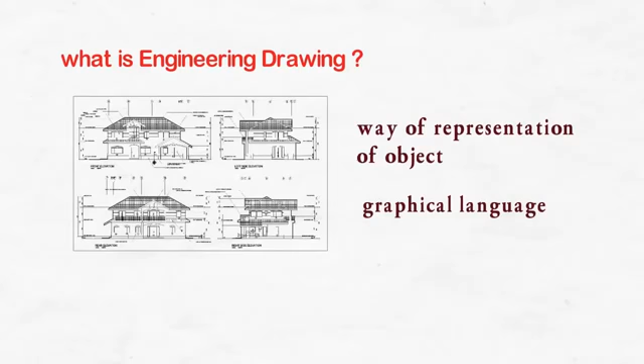It is a way of representation of objects or ideas on a plane of paper. This is not only drawing of pictures, it is a language also, a graphical language जो कि आइडियाज और इंफॉर्मेशन को एक माइंड से दूसरे माइंड में कम्युनिकेट करता है। तो चलिए देखते हैं व्हाट आर द वेरियस इंस्ट्रूमेंट्स रिक्वायर्ड

फॉर इंजीनियरिंग ड्राइंग। द फर्स्ट वन इज अ टी स्क्वायर. It is used for drawing horizontal parallel lines. The second one is set square. They are used to draw parallel, inclined and perpendicular lines.

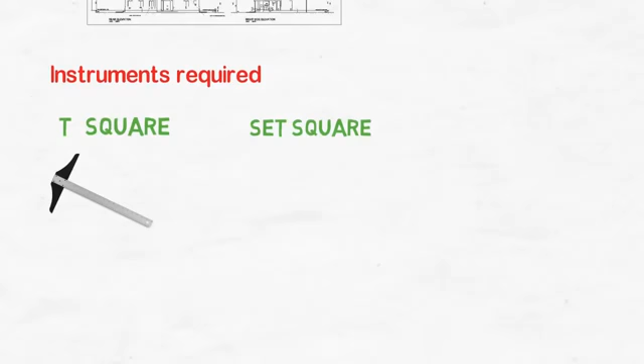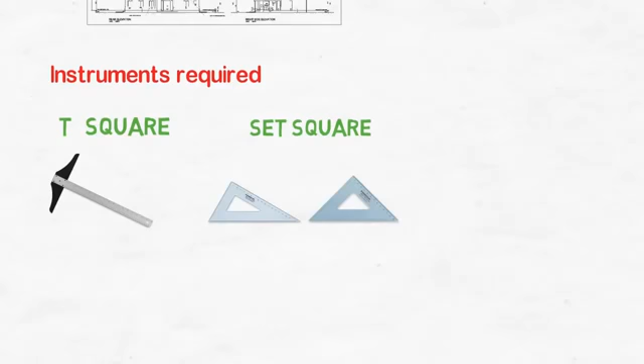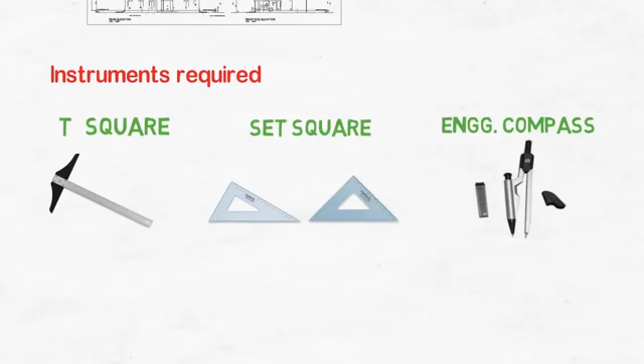Engineering compass is used to draw circles and arcs. Large compass is used for diameter greater than 50 mm and a small compass is used for diameter less than 50 mm. Divider is used to divide the lines or curves into equal parts.

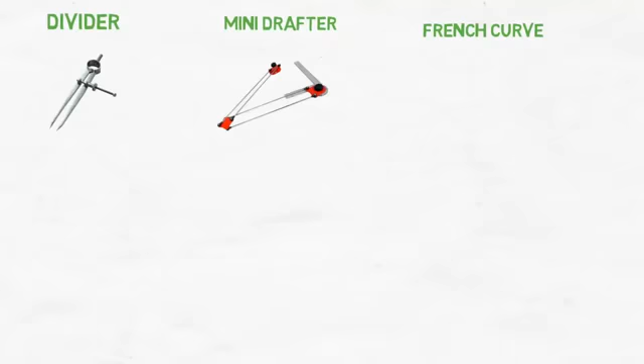Mini drafter can be used for different drafting operations like drawing horizontal, vertical and inclined lines, also parallel and perpendicular lines. It can also be used for measuring lines and angles. We use French curves for drawing curves that have different radii and curvatures, which cannot be drawn with a compass. Also, we can use French curves for connecting a set of points that do not lie on a straight line

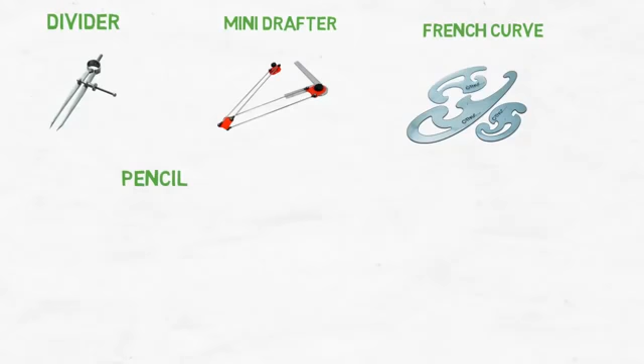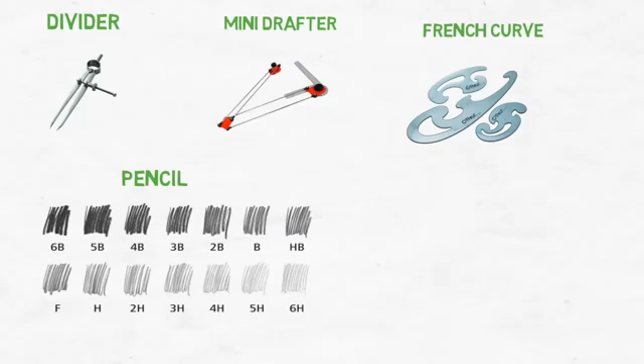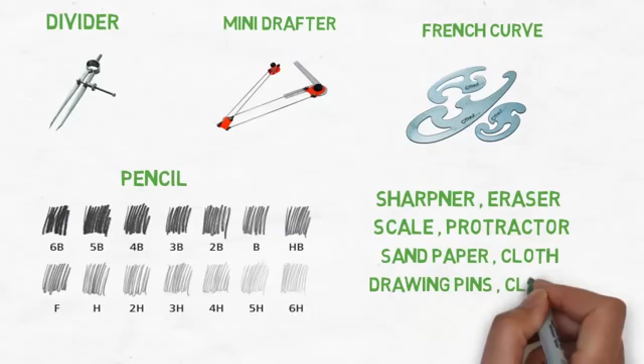or a circle. Pencils are the primary tool in engineering drawing. They are easy for erasing and making any change. Various grades of pencils are available nowadays like HB pencil, 2H pencil, 2B pencil. Here H denotes hardness and B denotes boldness. And some other tools like sharpener, eraser, scale, protractor, etc. are also used in engineering drawing. Now come to the conic section.

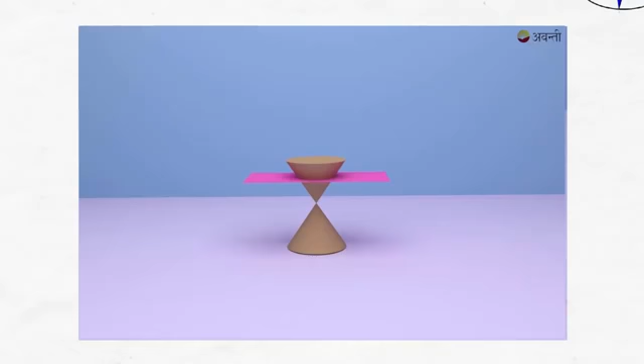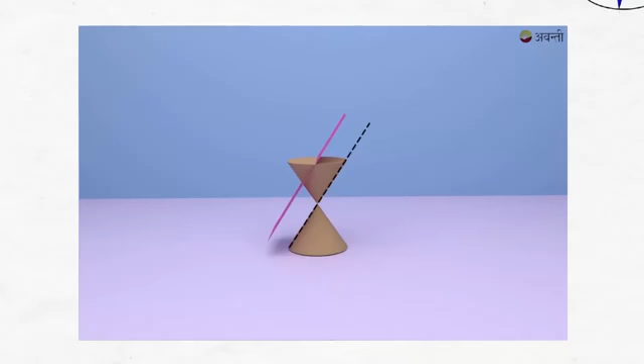आइए देखते हैं कौन कौन से शेप पॉसिबल है। If we cut a cone parallel to its base, then we will get a circle as shown in figure. And if we cut it in the direction slightly inclined to the base, then we will get an ellipse. And if this inclination is such that the plane of cutting becomes parallel to the slant length of the cone, then it will produce a parabola. And when we cut it in a direction perpendicular to the base, then we will get a hyperbola.

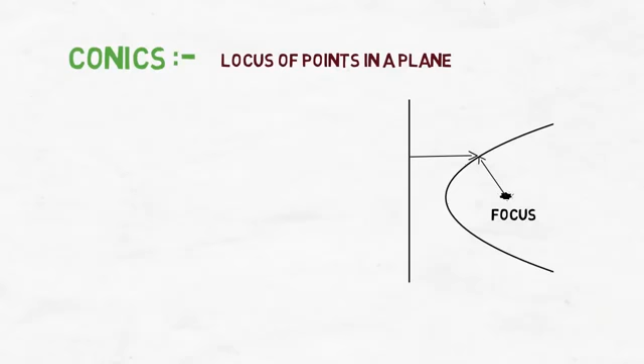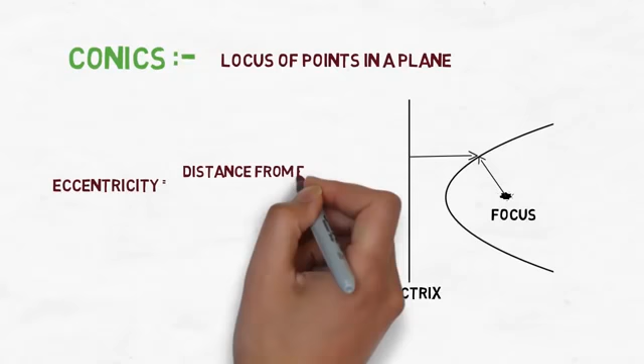Conics can also be defined as the locus of points moving in a plane in such a way that the ratio of its distances from a fixed point to the fixed straight line is always same. This fixed point is called focus and the fixed line is called directrix. And the ratio is the eccentricity of that curve. So eccentricity equals distance from focus divided by distance from directrix.

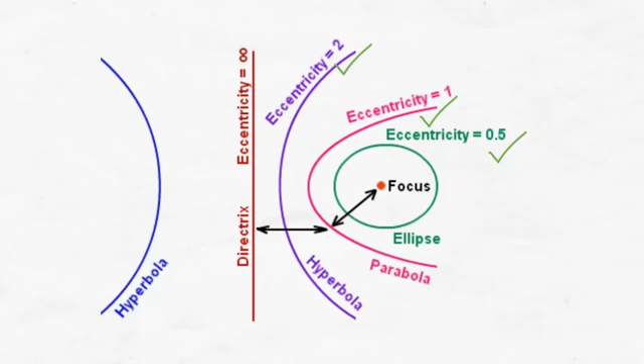For ellipse, eccentricity is less than 1. For parabola, eccentricity equals 1. For hyperbola, eccentricity is greater than 1, and eccentricity equals infinity for a straight line. Now let's discuss drawing sheets.

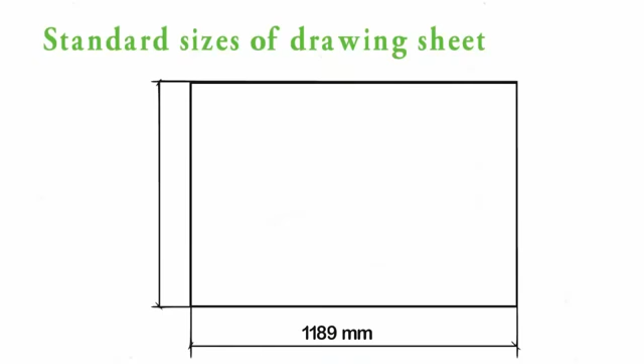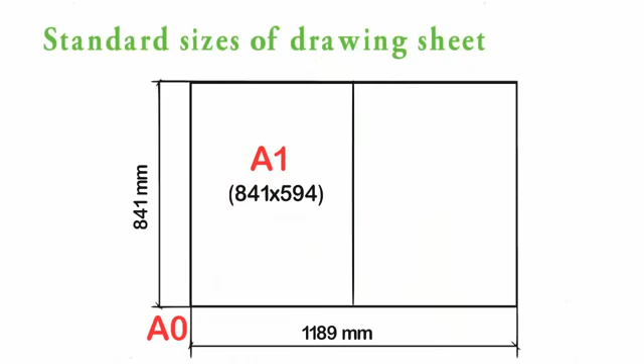ISO has given some standards for the sizes of drawing sheets, like ISO A standard. In this standard, the ratio of length and width must be √2:1. Like if sheet size is 1189 mm long and 841 mm wide, then it is called A0 size. When we cut it in two equal parts along its length, then we get two sheets, each of size 841 × 594 mm. This is called A1 size sheet. When we cut this A1 size sheet in similar manner, then we get A2 size sheet, and similarly A3 and A4 size sheets.

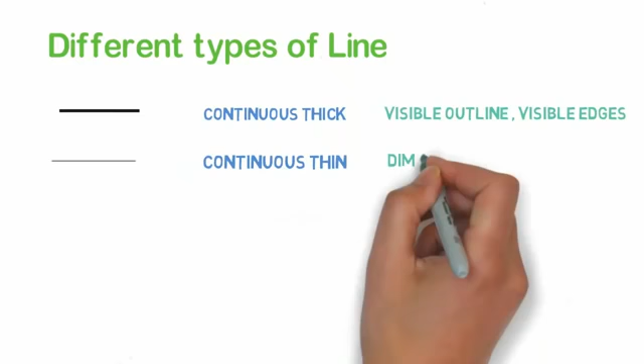In engineering graphics, the details of various objects are drawn by different types of lines. Each line has a definite meaning and sense. So next I am going to show you different types of lines and their uses. The first one is continuous thick line. This is used for visible outlines. Continuous thin lines are used for dimension lines or projection lines. Continuous thin lines with zigzags are used to show long break lines.

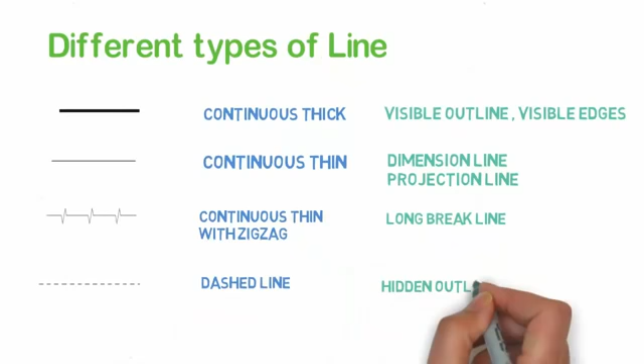Dashed lines represent hidden outlines or hidden edges. Chain thin lines are used to represent center line, line of symmetry, or trajectories of any parts, or pitch circle of holes and gears. And the chain thin lines with thick ends and also a change in direction represent cutting plane.